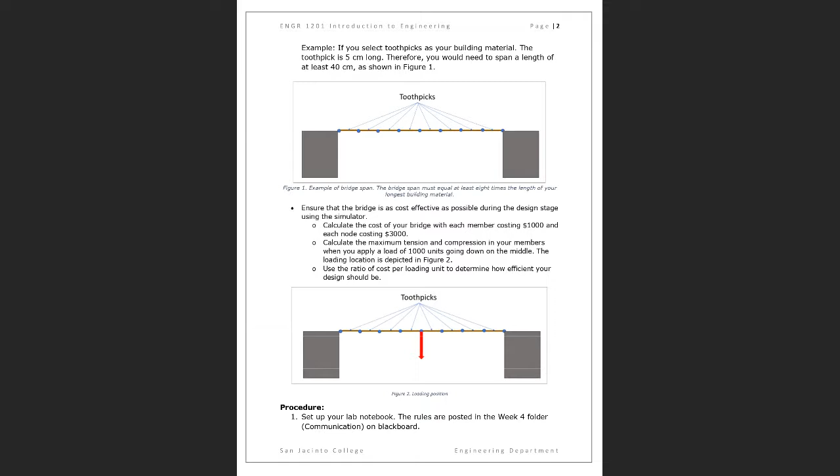So say you used a node, like say you use glue, to glue one piece of a truss. Let me go to my whiteboard, because I know most of you are probably visual learners.

So you have... don't mind the jaggedness, it's all going to make sense in a little bit, maybe. These little circles that I'm drawing are nodes or joints.

So they connect your member. What are you going to use to connect your member, glue or tape? I think I said use tape, but hey, it's been a crazy year starting out. I'm going to say you can use glue, okay? So you can glue one leg of your truss together.

However you decide to build your truss bridge is up to you. So then if I were to go across, that's fine, it's okay, you can use glue. We're going to go with glue.

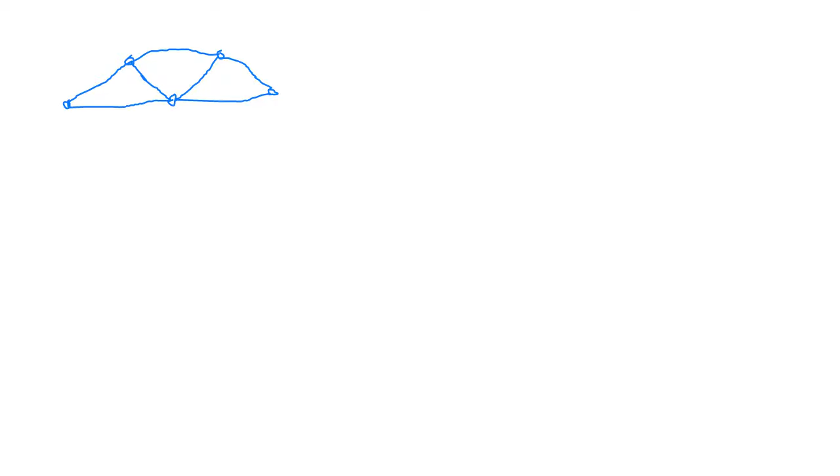And don't mind this, it's like a paper bridge. That's why it's so wavy looking, because paper is hard to make straight.

And then it's not sturdy, so all of these little wiggly lines, because I just drew you a paper bridge. With that being said, you're going to have your spans.

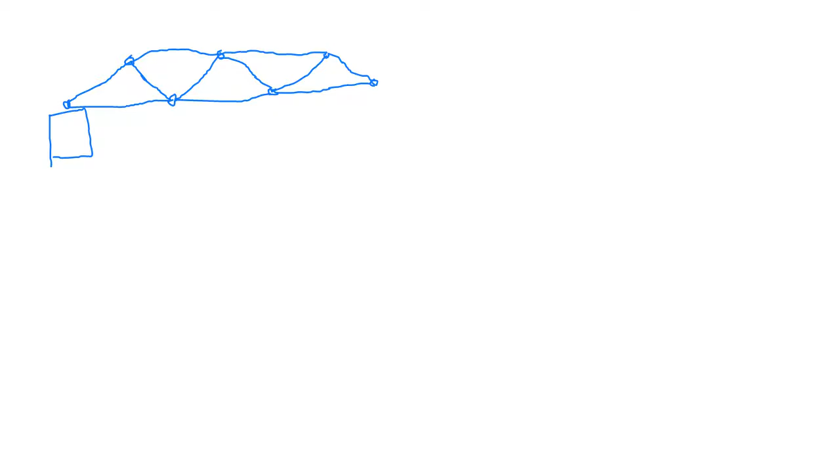Or what have you, it should actually be touching. It's not like what I said earlier. It's not that it's not touching, no, it is touching.

Okay, but it's not anchored, right? You don't have a weight.

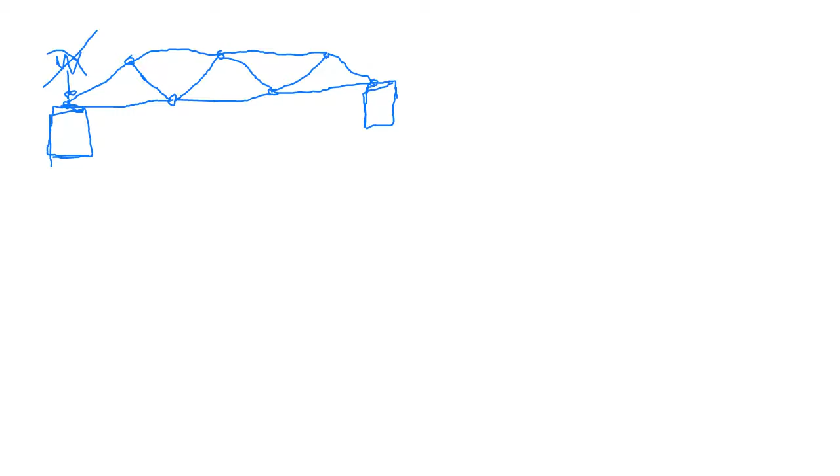There's no weight here, it's just spanning across. You can put your weights in the middle, or along the joints. You got to determine how much your bridge can hold up. If your bridge doesn't hold up anything, you got to make note of that in your lab report, and explain what you could have done better to make your bridge hold up some type of weight, even 1 penny at least.

And if you say, well, it's because my material, I used paper, I didn't have anything else, you need to explain that. Just say my building materials were too flimsy.

Also, when we talk about cost, each one of these nodes or sections that you glue together would be worth 3,000 each. So you're going to have to calculate the total cost of building your bridge and give a synopsis on how you spent so much money and your bridge was able to hold up so much weight. Explain how the cost correlates to the outcome, or how efficient your bridge was. Like, I spent a bunch of money but my bridge was very sturdy or efficient as a bridge, versus I couldn't actually walk across that thing but I did spend a lot of money. That's going to result in a lower grade.

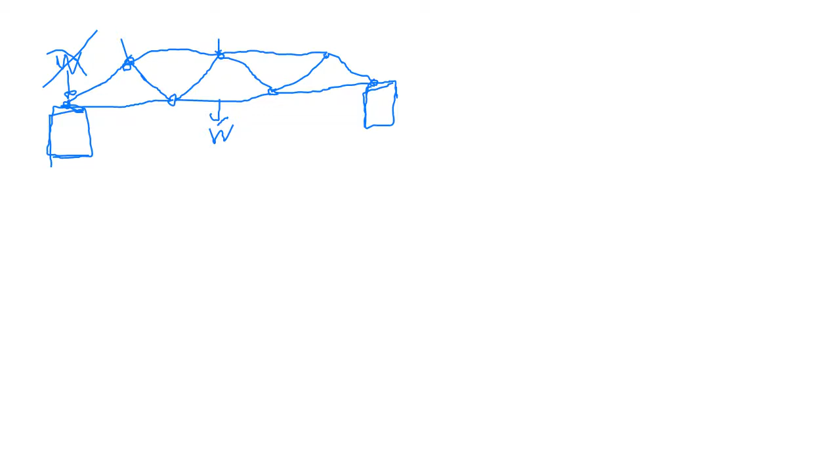All right, any questions? No. There is no cost limit, so if you spend a million dollars and your bridge doesn't hold 1 penny, yeah, you're not gonna get a good grade. Just saying, Cassandra.

So be wise in your building and spending. Yes, be wise in your building and spending.

All right, so let's look at this other lab. Let's see. Everybody good on the bridge lab? No other questions? All right, cool.

I know you've probably looked at it, but I wanted to bring it up. The lab notebook is where you do all of your designing. You can compute your cost — we're on the bridge lab — so you can talk about how much material you're going to use, how it's going to span, the length of each member. You can discuss if you're going to add glue, use tape, or a combination of both. They both cost 3,000. And then there's this simulator.

The simulator is meant to help you design your bridge, but it's really just a fun little tool where you can build a bridge. I would just say, whatever — I mean, I shouldn't say that, I'm recording this, but use the simulator, and you can get some calculations from it, and add it to your appendix. But the simulator really isn't going to...

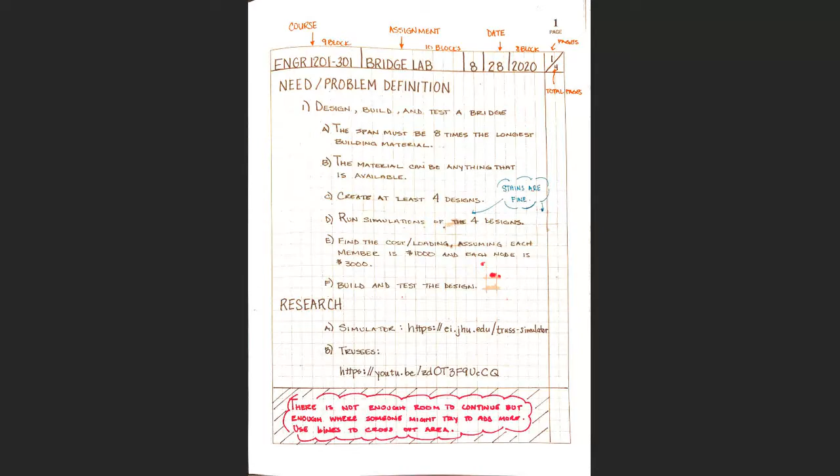...because it depends on the material, and you can't pick your material in the simulator. All you're doing is putting together some lines and putting a weight on it, and it runs some numbers to show how much load, resistance, or stress is being placed on your bridge. You can calculate those by hand, but it's really not worth it — just tell me how much weight your bridge held.

Okay, boat lab — now this is a fun lab. I like the boat lab because it's quick, it's easy, it's simple. Real simple, and not a lot of thought that goes into it. A little bit of thought, but not a lot.

In the boat lab, you're going to get some aluminum sheets and cut 5 by 5 inch squares of aluminum foil. You're going to need something — a plastic tub, you can do it in your sink. A lot of students did it in their sink last semester, or you could do it in your tub. If you've got the little plastic bins you can put water in, you can use those as well.

So what you're going to be doing with these aluminum foil 5 by 5 inch square sheets is designing some type of a boat with it. Now you can get as creative as you possibly can with this assignment. You can design your boat like the Titanic, or just make it into a square sheet, whatever. You can do it however you want, but you can only use one sheet per boat.

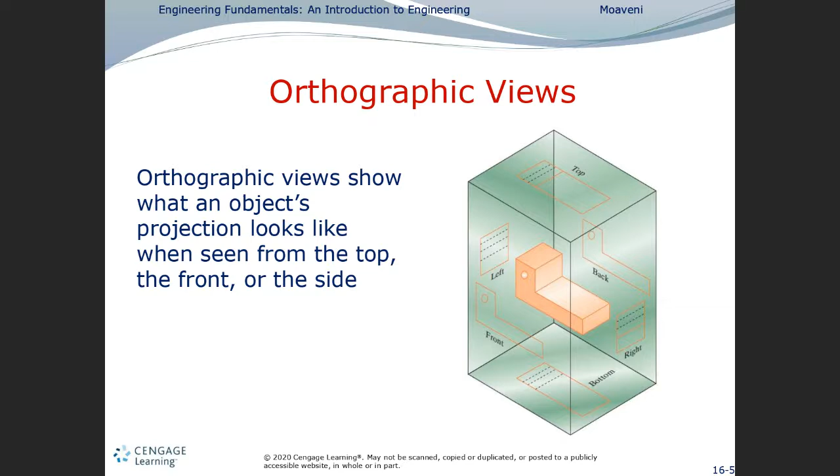You have a front, a back, a top, a bottom, and some sides. So if you're drawing that in a 2-dimensional state on a sheet of paper, this is how it would look. If you were to draw yourself in 2D, this would be your face in 2D. Then you have your top, meaning the top of your head in 2D facing you, as if you're looking at the top of your head. Then the bottom would be your feet. Then you have your sides and your back.

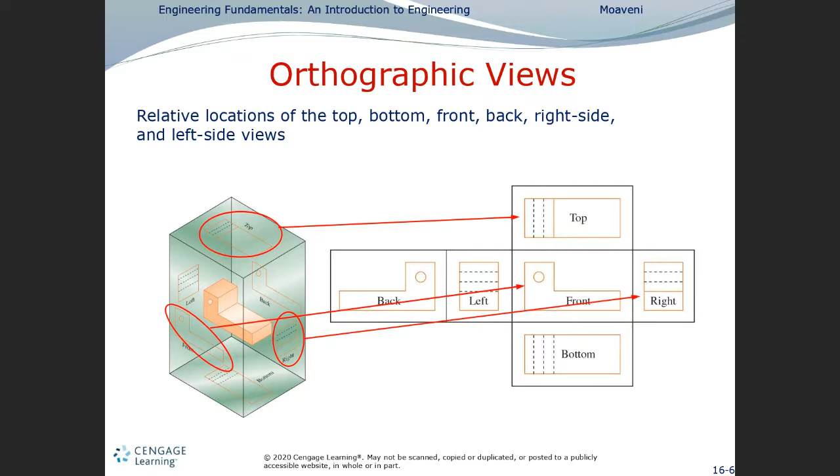So when I ask you to draw an orthographic view, this is what I want to see. If I say, hey, of this particular object, I want you to draw an orthographic view in this particular way. And this particular way that you're seeing is third point perspective, or third view perspective.

Third view perspective mainly just means you're going to start with a front, you're going to have your top, and you're going to have your right. That's third view perspective or third angle perspective. You have your front, top, and a right.

With that being said, I tell my students, because this is a fact, if you're drawing something for a company, this is the way it should look. It's like, what do you mean? Well, it needs to be front. The top is above the front, because if you're looking at the top of the object, it will be on top of the object. Does that make sense?

This is the front of the object. On top of the object, if you were looking down on top of it, it will be above the front. And then if you went to the right, like if you just took your head to the right of the object, that would be the right.

And the right would go on the right. Now, a lot of my students will have the top, front, right, and many of you still going to go top, front, right, and that's okay. My students last semester, I didn't take off points, even though I told them in lecture, hey, that's not how you're supposed to do it. They still did it. And then some of you will have top, front, right, all horizontally. And that's okay. It's not okay, but it's okay. Because I'm just going to say, hey, as long as you know how to draw the views, we're good.

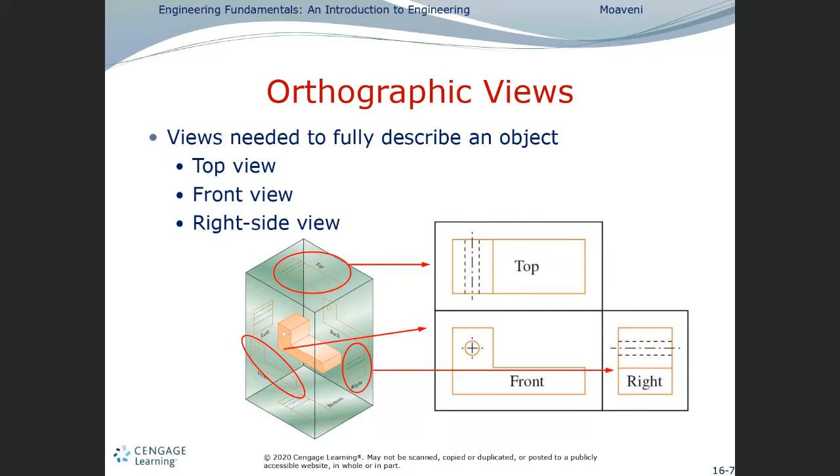So we talked a little bit about dimensioning and tolerancing. Dimensioning is just the measurements of the object. All right, and so tolerancing, go to this sheet, this visual.

Tolerancing is to give your machinist room for error, right? Because there's always going to be some signs of error within your object. It's just because machining, nothing's going to ever be perfect. So you want to give a tolerance. And then also, some of these things are going to have a hard tolerance, meaning a larger tolerance or a tighter tolerance.

Like for a hole, typically we say to the third decimal place, right? So if this hole is, say this hole is 4 inches in diameter, I'm going to say 4.000, because I want to have a tighter tolerance for the shaft that's going to go inside of this hole. And so that shaft will probably be 3 point, and I probably have plus or minus 0.005, or 5 thousandths of an inch, as my tolerance. So it'll be a 4-inch diameter hole plus or minus 5 thousandths.

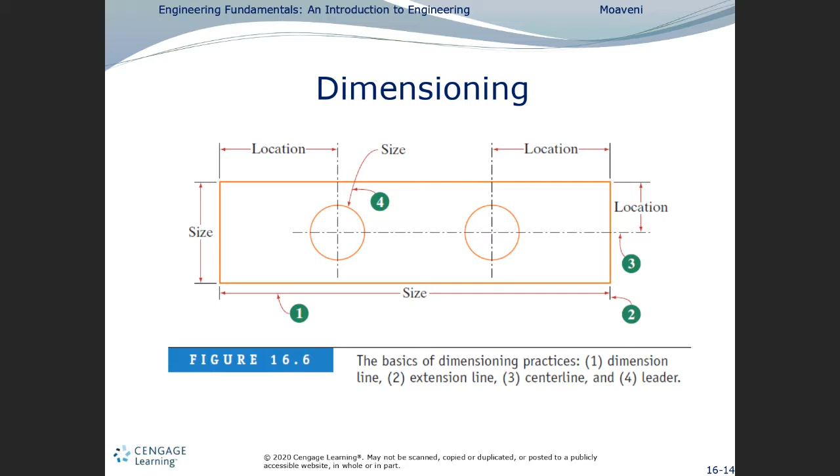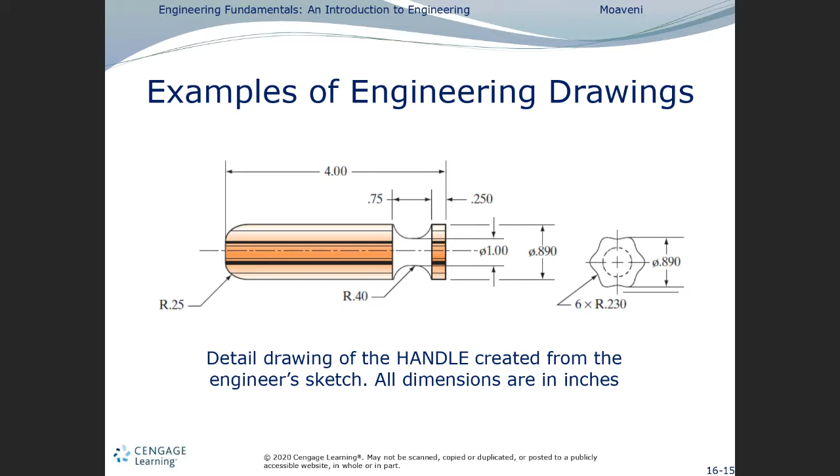We don't want that. But in dimensioning, you want to dimension the locations of the holes, obviously the thickness of this particular object here, the length, and we already went over that. So real simple, easy kind of stuff, right? And so your dimensions, if you look at displaying it, it'll look like so. And you don't want to over dimension it, right? You want to fully define it, you don't want to over define it. That's just bad engineering. It's like, wait, you don't need that dimension there. It's just like having too many views in an orthographic view when you're just giving it to the machinist. Any questions?

All right, and this just goes into tolerancing and things of that nature. Now, isometric view. What is an isometric view? So an isometric view basically captures all 3 orthographic views in one object. So what does that mean? Well, it means this: I'll give you a view and it'll show you all 3. It'll show me front, shows me the top, and it shows me the right, and it's captured all in one view.

Now, typically we don't dimension an isometric view. An isometric view is just giving the machinist or manufacturing facility what the object actually looked like in a 3-dimensional state, right? So if there's any guessing, hey, let's remove it. Just throw an ISO view on your drawing, and then bam, you got it. It just gives the volume of the object. So if you remember, for your test, the definition will be: an isometric view captures each of the orthographic views in one view.

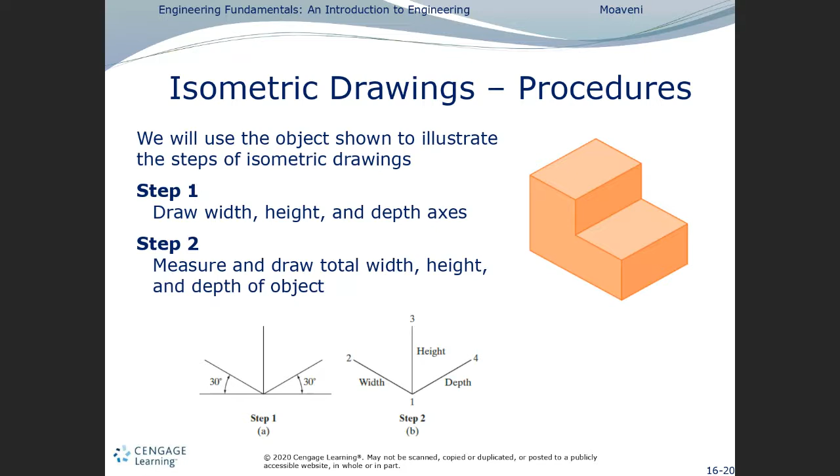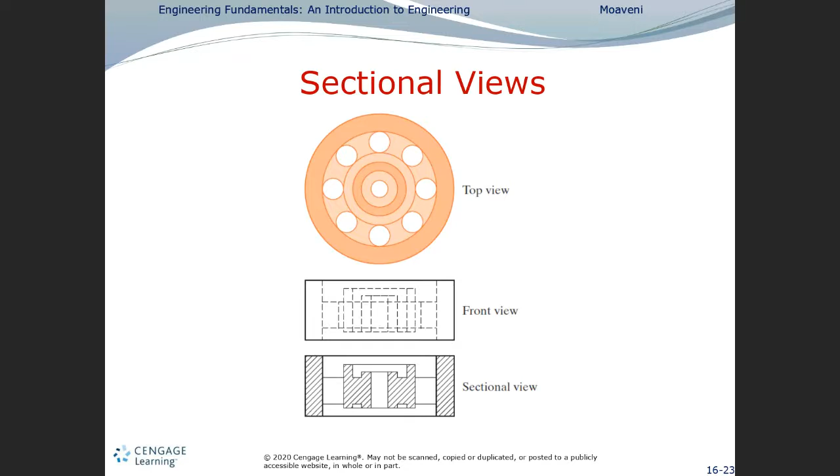And just another slide that shows sectional views.

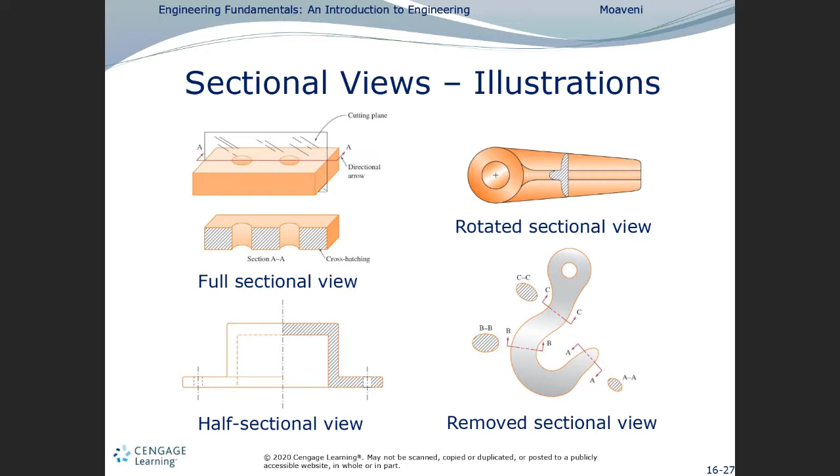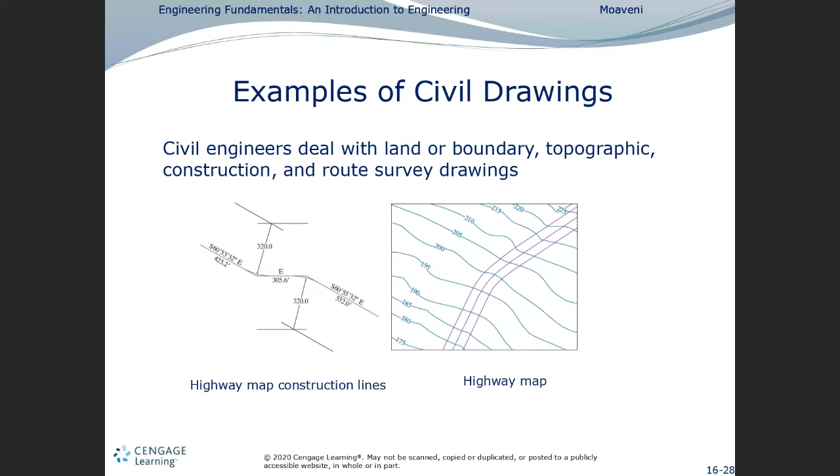If you ever see people on the side of the highway or road with this little telescope on a tripod, looking through it, it's actually a measuring tool. It's measuring and showing dimensions or levels of the terrain. I've never actually looked into one, but I've talked to guys that have—it's a pretty cool tool. It helps this modeling software that civils use to model the terrain, so you'll know how you're going to build your highway based on the levels of the terrain.

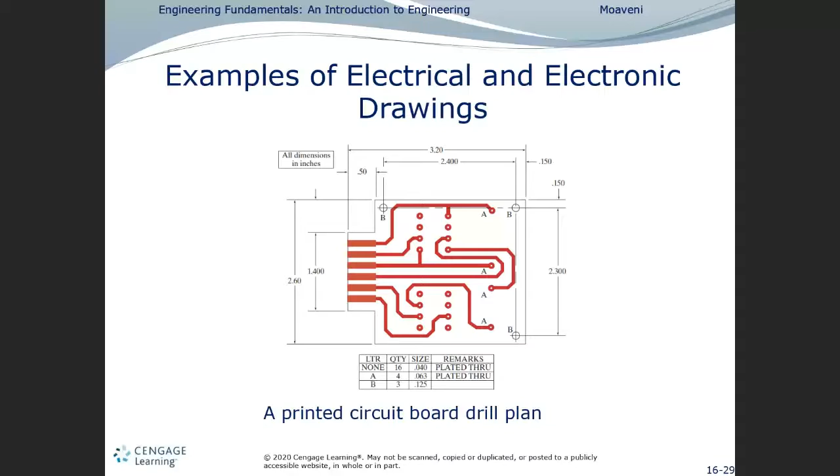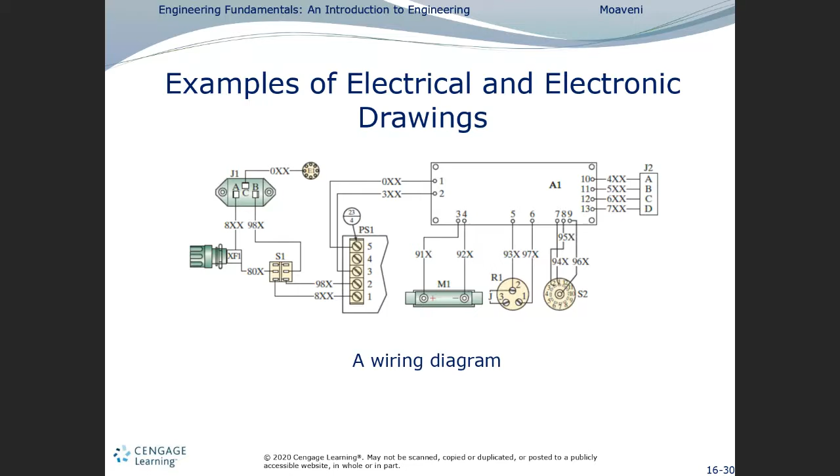AutoCAD is used for making these circuits, or P&ID—well, P&ID is actually a pipe and instrumentation diagram, but it's more like an instrumentation diagram. AutoCAD is used. Here's another example of an instrumentation diagram. So, any questions on that?

And then you have solid modeling, as we talked about. Solid modeling is just what it says—you draw solid models of an object, and then you can convert that solid model into a 2D model for the machine shop. It's pretty cool.

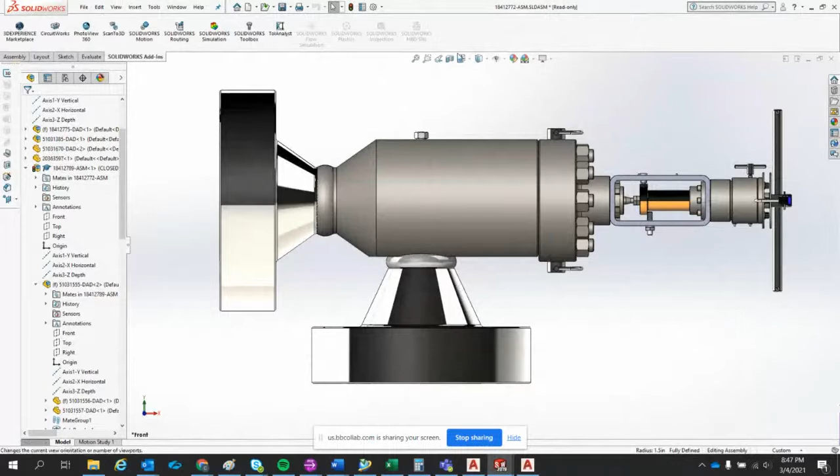All right, so this is a solid model, right? And when I cut it, then you see all these other components on the inside that you wouldn't see otherwise. So the cut just shows a sectional view of the solid model. All right, any questions?

Cool, so that's it, that's all I have. Let me look through the slides, see if there's anything more noteworthy. No, don't see anything noteworthy. Oh, one other thing I will add.

You want to analyze—I don't know what kind of civil computer-aided engineering models they'd use, but something like a simulator that determines how much load a bridge can take, or how well your highway will sustain loads, and what's the lifespan of your bridge. You have these computer-aided engineering softwares we can run analysis on, like ANSYS for mechanical engineers, and Abaqus—these are also softwares we can run analysis on. But yeah, that's pretty much it.